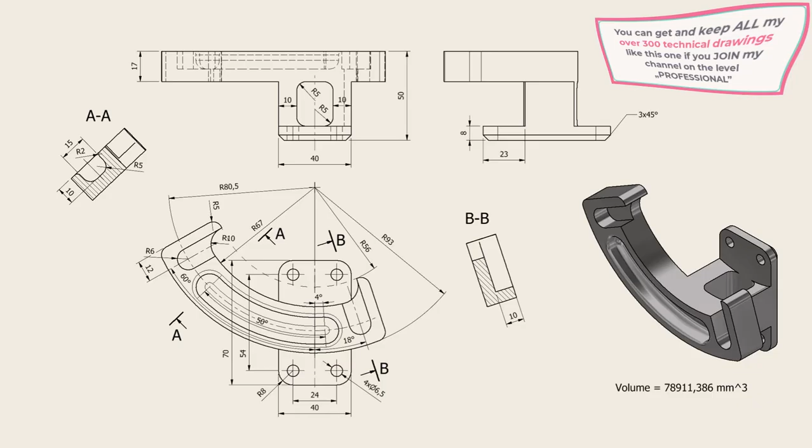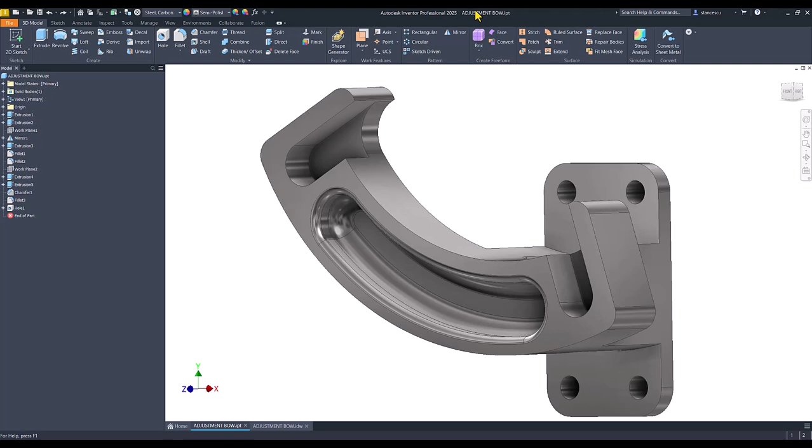Hi my friends, today we model this part that has many interesting shapes. The name is adjustment bow and the drawing is here.

We start with this contour. Radius 93, radius 56, radius 67, angles 60 and 18, an extension of 12 to both sides, and radius 10 here, fillets radius 5 all around.

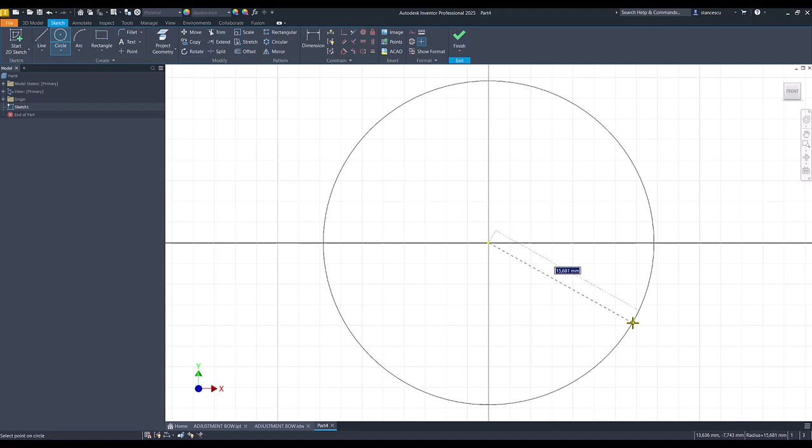So let's start. New standard millimeters IPT, XY plane, and we start by creating 3 circles with radius 93, this one 67, the next, and 56.

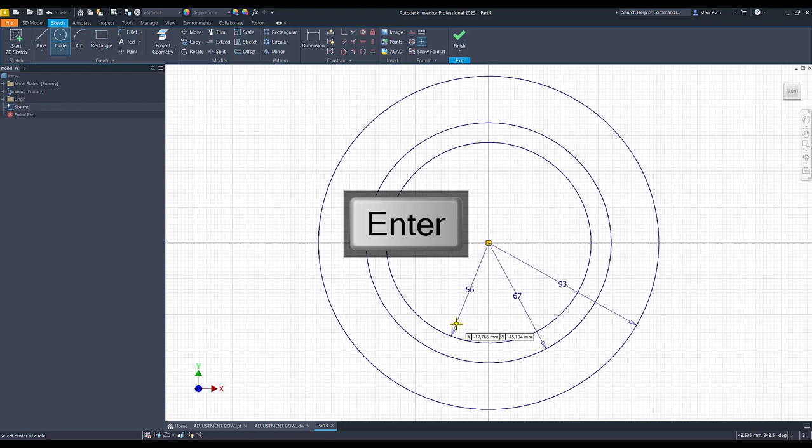We draw 2 lines, as you can see, then a parallel from a point on the external circle, a parallel with this. I hover on it and I go right here. The other similar line, I hover here to get the parallel. The parallel is this.

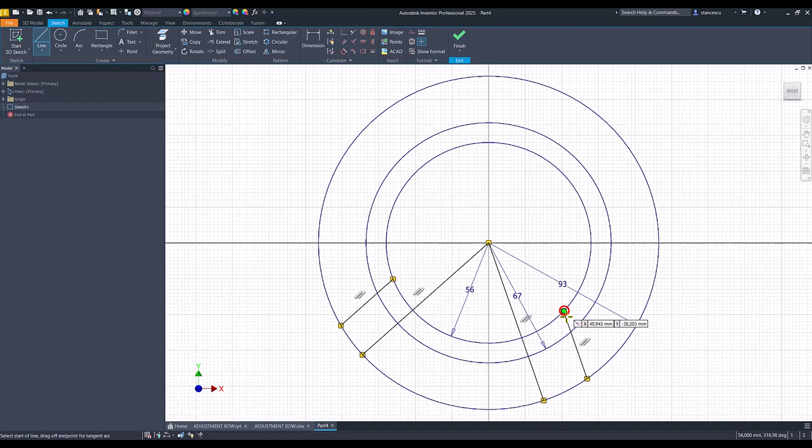The distance of 12 to both sides. I copy dimension from here.

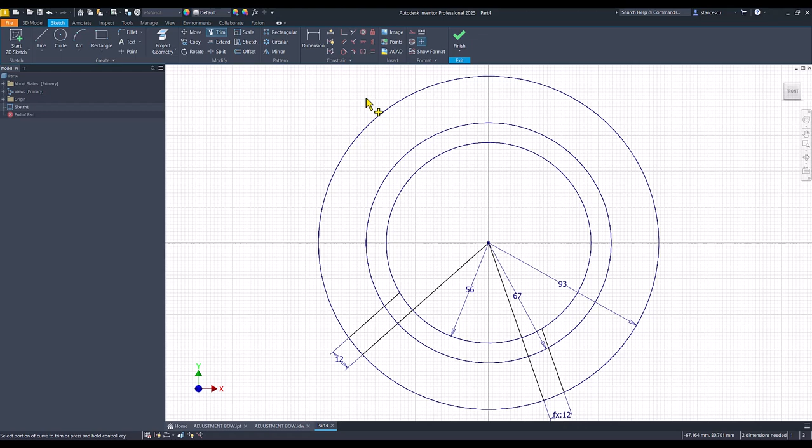Now I apply trim in a special way. Be careful. I keep pressed the left button and I go through those circles.

These 2 lines are construction, and you see here a dimension of radius 6. From this axis there is a slot with radius 6. 12 minus 6 is this distance.

Good. I draw a small line from here. I hover to get the parallel and I go here. Same to the right. Start, hover, parallel.

Then trim to this 2. Dimension of 12 minus 6, to be scrupulous. And the other dimension is identical, so I select this.

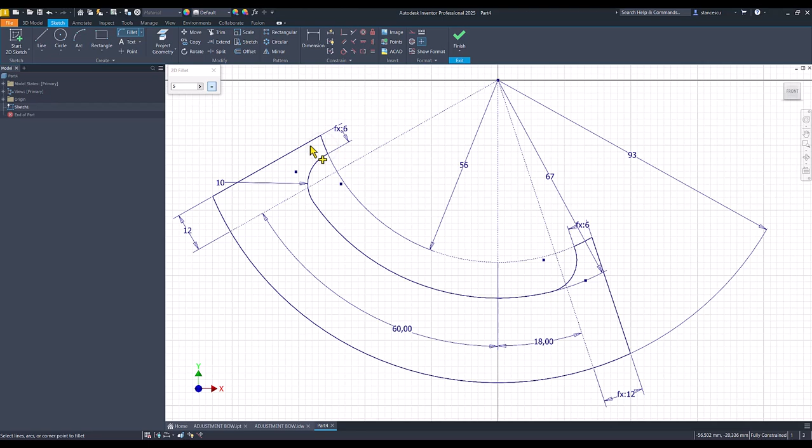Then the last fillet of 5. To this corner, and the other 2.

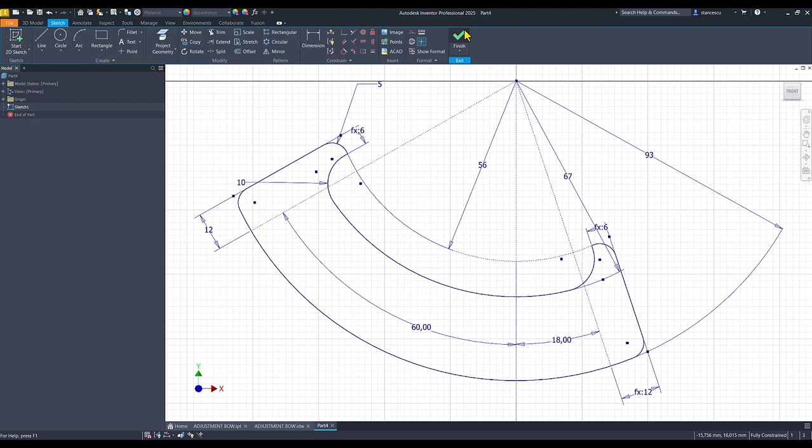What is the thickness of the extrusion? 17. Finish sketch, extrude, the other direction, and 17. This is the first feature.

Now we create these 2 slots. Dimensions are radius 6 and distance 80.5.

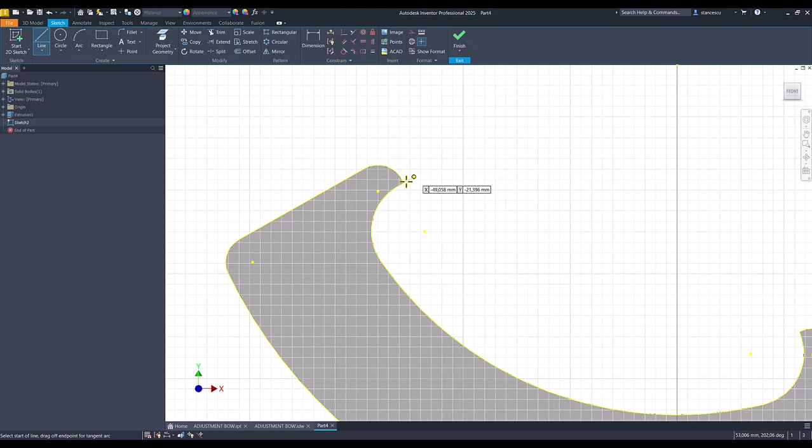We select this face. We start from the end of this short line. There is a line of 1 millimeter here if you want to know. And we go to here. We keep pressed the left button and we go to this point. Then tangent ending here.

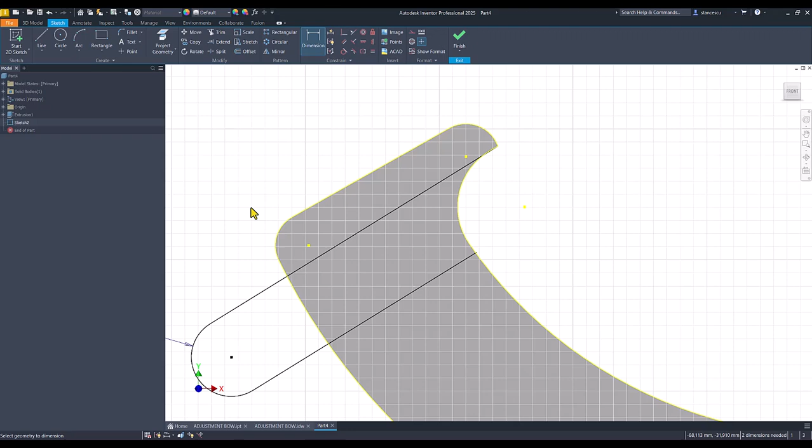Dimensions radius 6 and distance from this point to the center point is 80.5. Finish sketch, extrude this, cut on 10 millimeters. Okay.

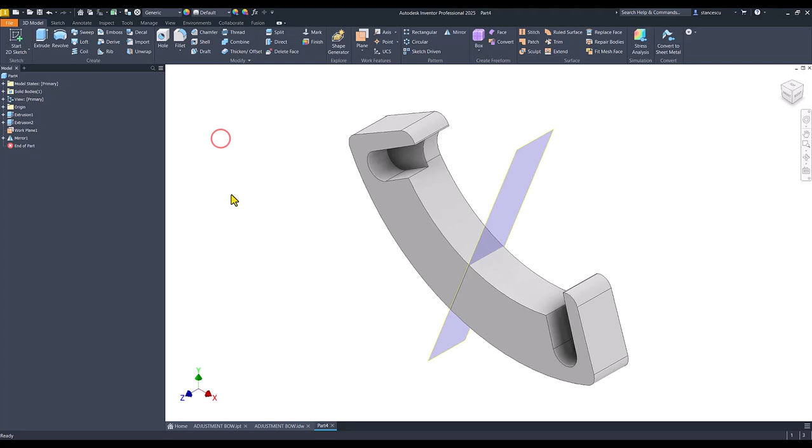To create a symmetrical slot on the other side, we create a new plane based on these 2. This is the mid plane between them, and we apply mirror of the last feature about this new plane. This plane is no more necessary to be visible.

Then we create this curved slot. It has dimension 15, angle of 50, angle of 4. 50 is from this line, so it is the dimension of the whole slot. The radius is from this point. The depth is 10.

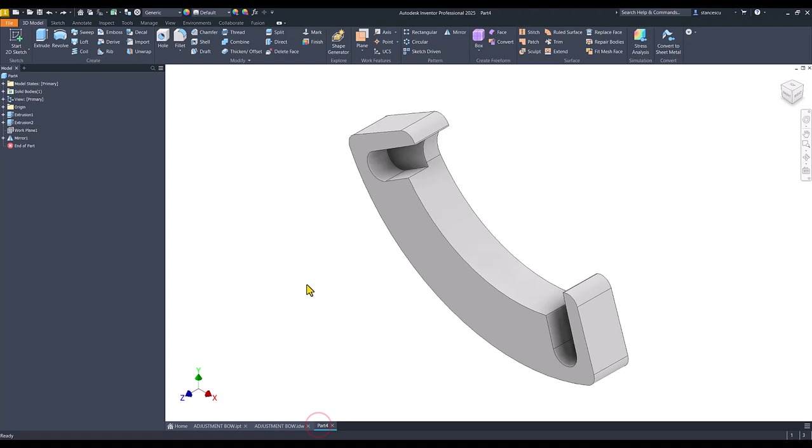We select this face. We use slot center point arc. We draw an arc, as you can see, and this is 15 divided by 2.

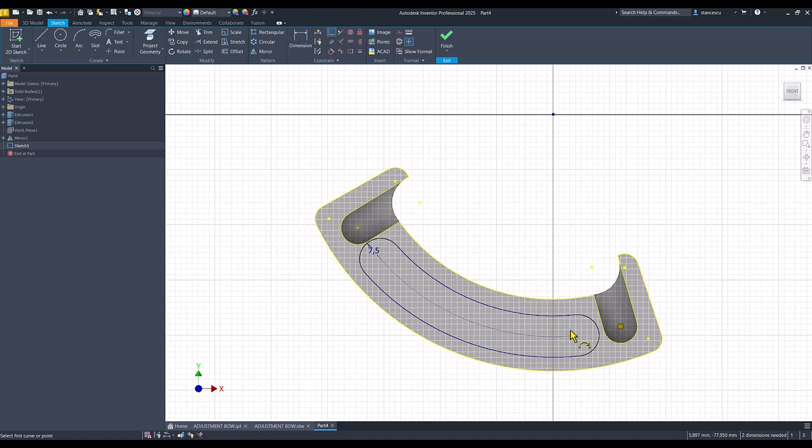We place this mid arc on this point, coincident. Then we draw 2 lines from center to center point and back to the other center. I draw also a vertical line here. All of them are construction, and angles are 4 degrees this, and 50 is all.

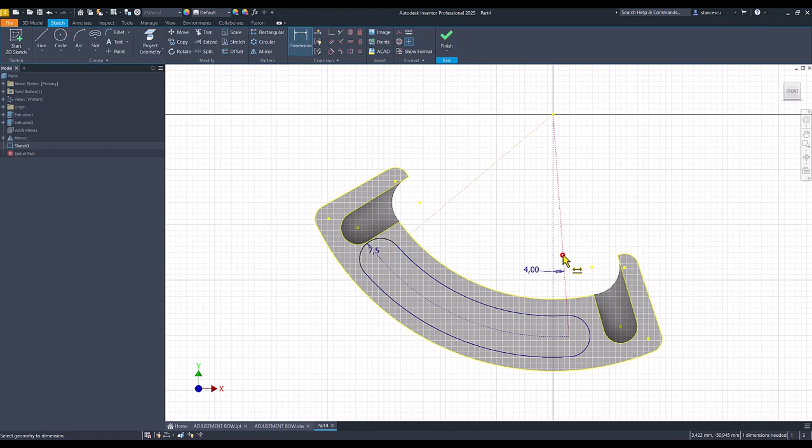Finish sketch, extrude this, cut, and also 10.

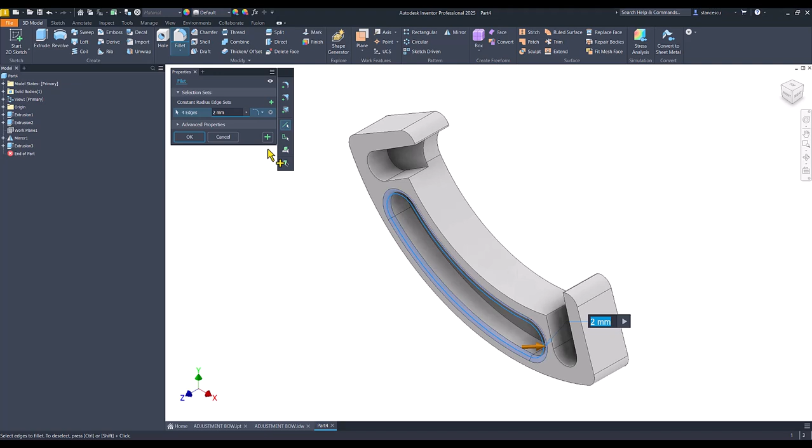There are fillets here, radius 2 and radius 5. Let's apply them to not forget. This is 2 by default plus 5 for the bottom contour.

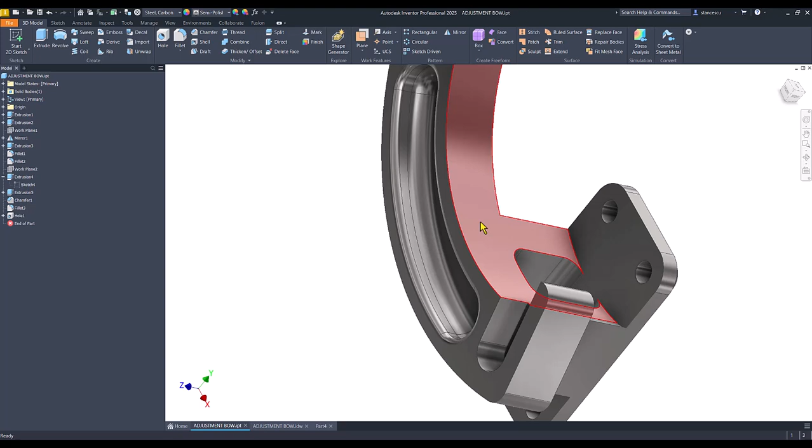Now we have to create this plate. You see these faces are round, and the dimensions are here, 70 on 40. This is centered on the center point, but the other has a dimension somewhere here. Where? Here, my friends, 23.

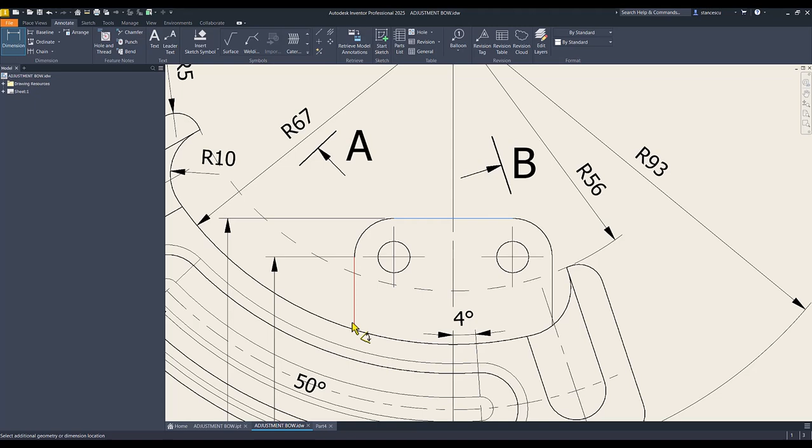This line is on this point. We can find this point by measuring it. 23. Yes? Good. This is the drawing.

We respect all we see here. The distance of the bottom face to this face is 50. And there is also a chamfer of 3 at 45 degrees on the bottom. I don't add, but you understand that 54 and 24 are positioning the holes, and they are in the center of radius 8. You can calculate them.

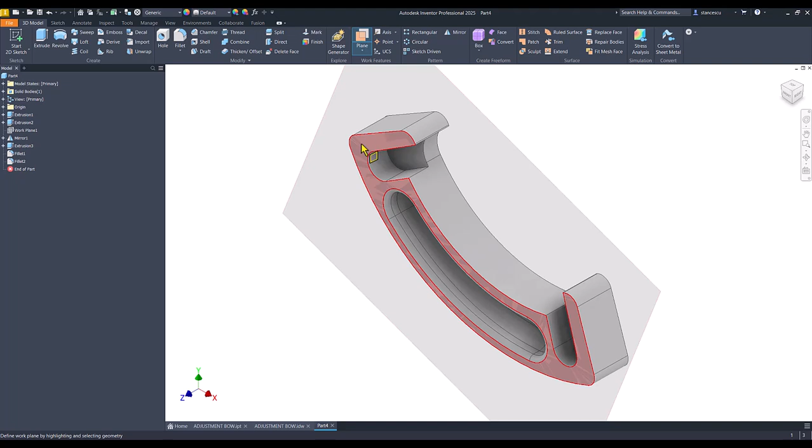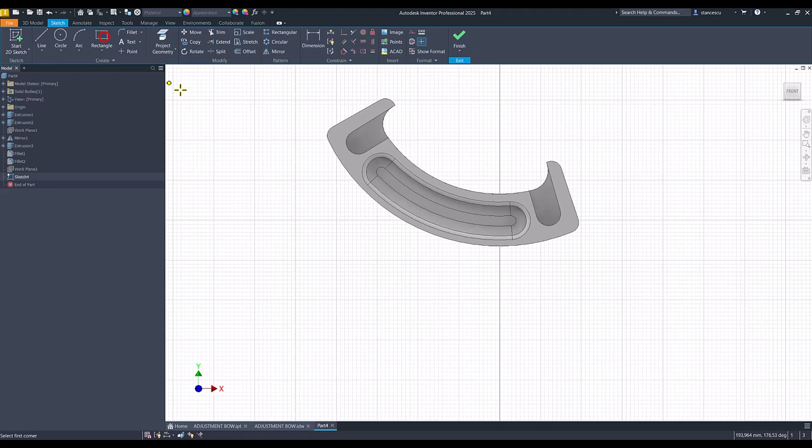Okay, let's do this all. I select this plane, I move it to minus 50. This is for the new sketch. I hide the plane and I draw a rectangle. Dimensions 40 by 70.

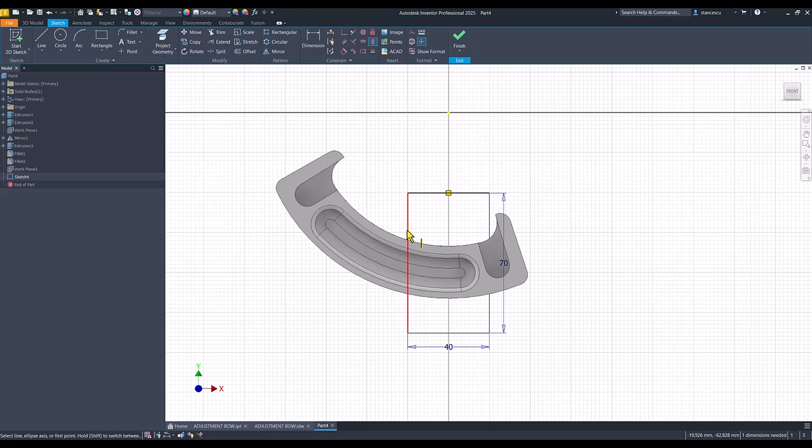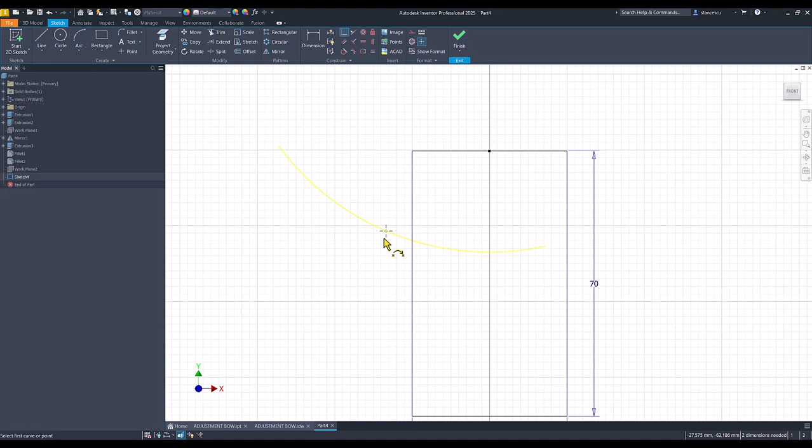We place on the same vertical this point with the midpoint, and we have to create that point to measure on vertical 23. To do this, I project this arc, F7, and now we have an arc and a line. We place a point on this arc and we make it coincident also with this side. Now we apply dimension of 23.

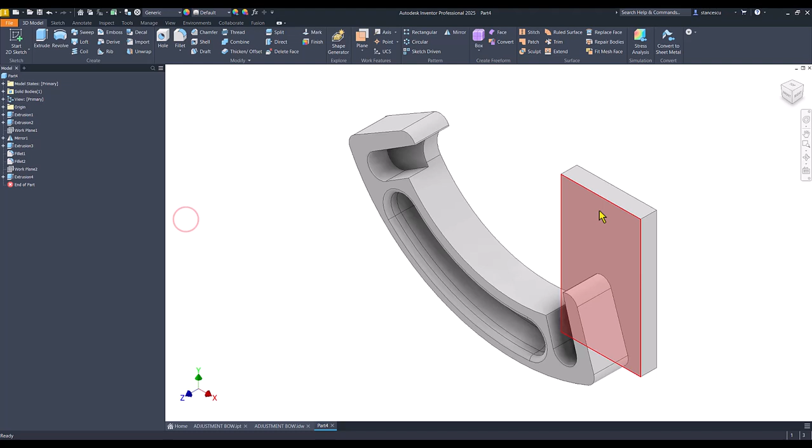Good. Finish sketch. The thickness is 8. Extrude 8. Okay, then fillets of 8.

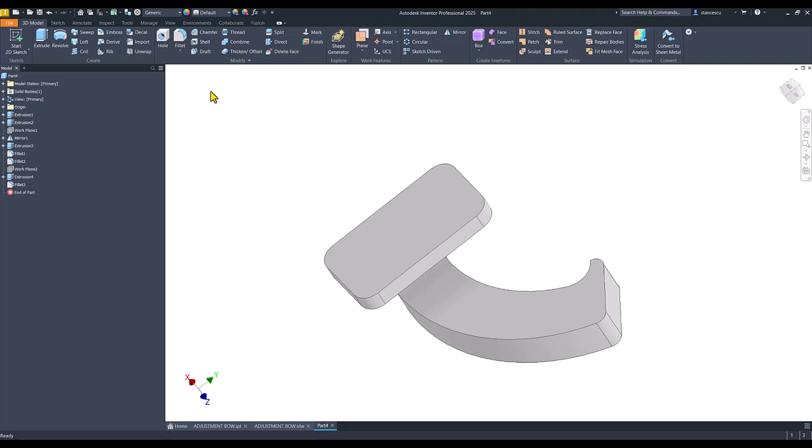On all the 4 corners. Okay, then a chamfer around here of 3, not 2. 3. Okay.

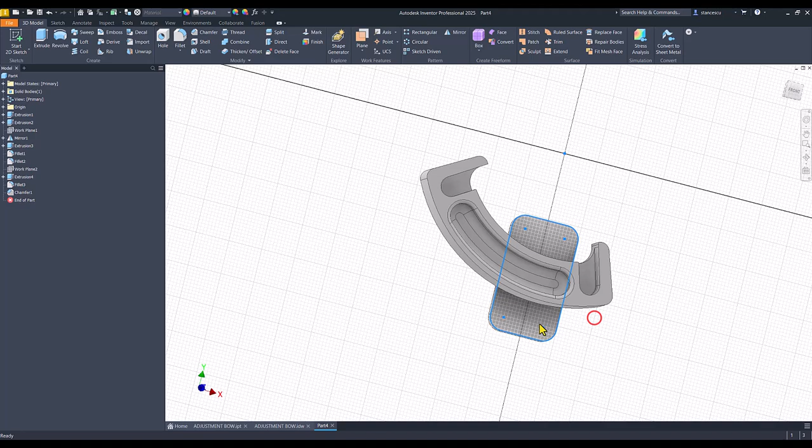Then the holes of 6.5 you see here. I select the face and I go out because I have centers. 6.5 on each point or center, through all.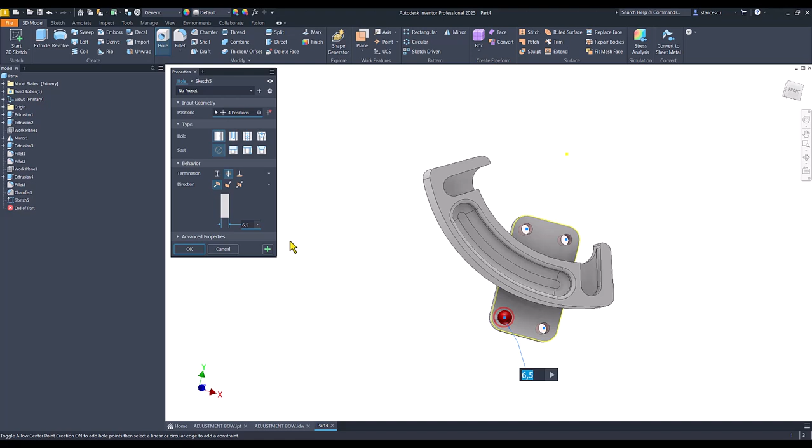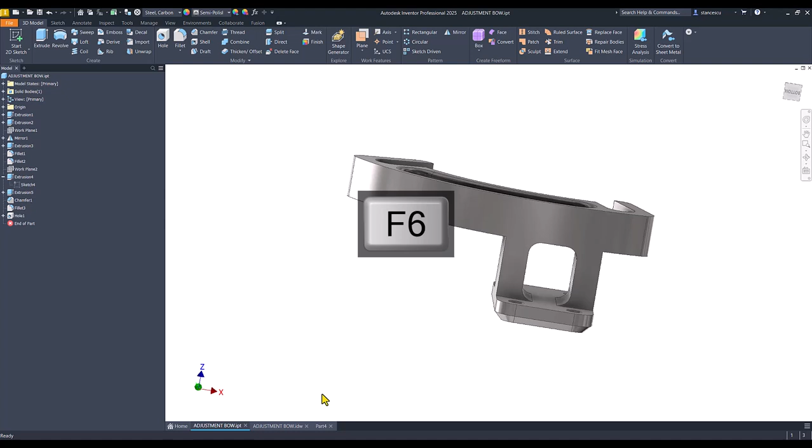Okay, these two solids are only one. We have to connect them, and we do this by taking a look of this. Dimensions for these two walls are 10 millimeters, ending to these contours.

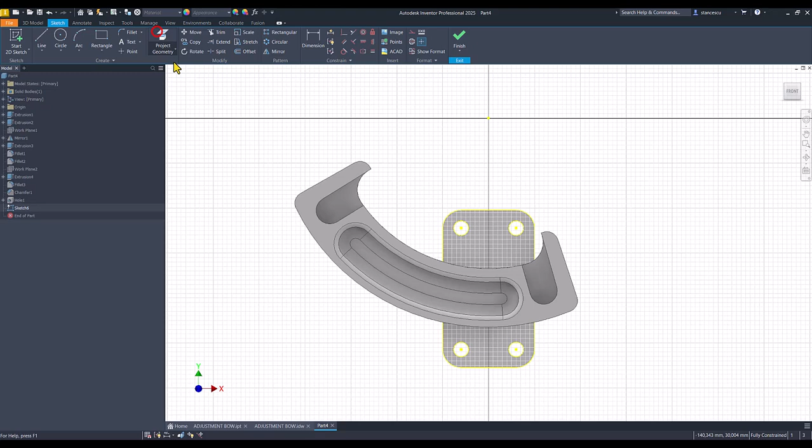Okay, we select this face, we project the two contours, this and this and this, and also this, F7.

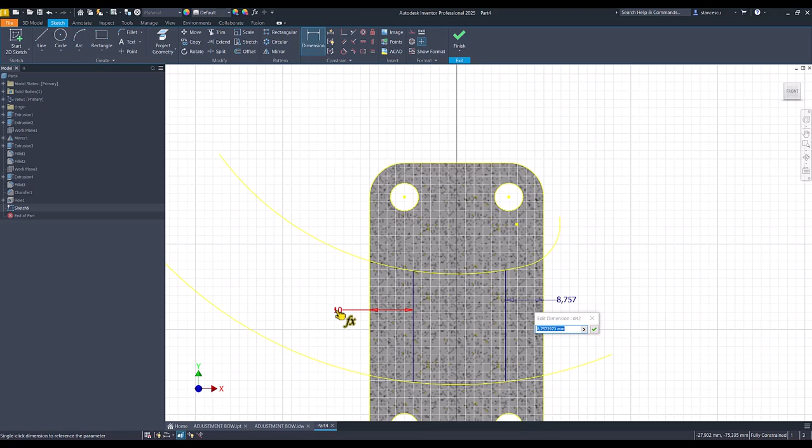Then we draw a line to connect these two arcs and another line to connect the other arcs. Both are vertical. Dimensions 10 to both. I take the dimension from here. They are equal.

Finish sketch, extrude this face and this area to the part.

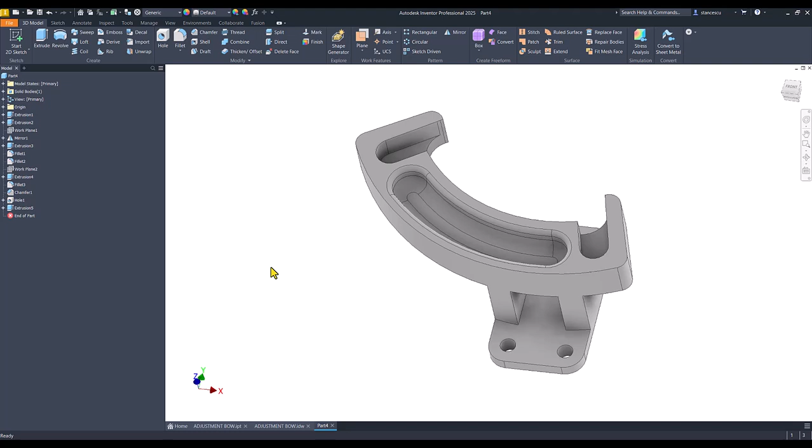The last feature is with these four fillets of radius 5. This is radius 5. Also this, this, and this.

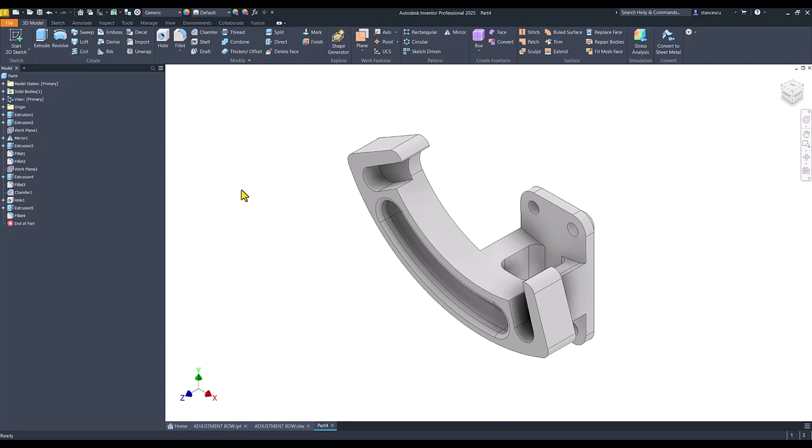I think that's all. Let's see. Properties, physical, update, copy, close, drawing, double click, and the new value is different.

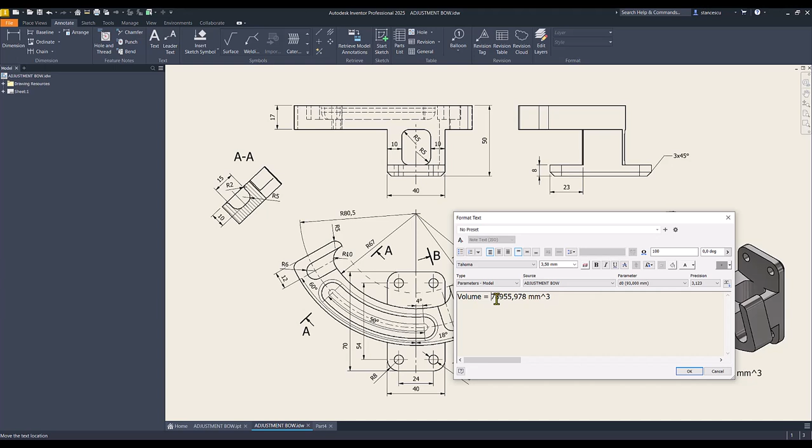Let me show you the similar font. You see the difference is at the fourth rank here, so we don't use the last one. It could be wrong. It's made also by me. The model is made by me, of course, and since we made together this model, then those dimensions are properly for the model.

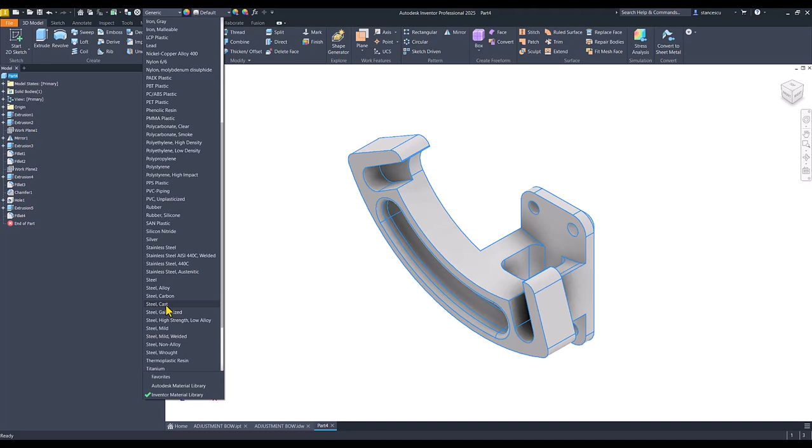We go to material. It is steel, carbon. Then we apply view default lights.